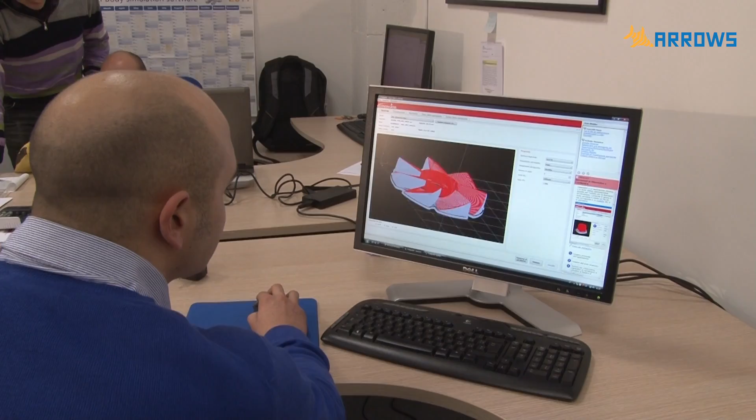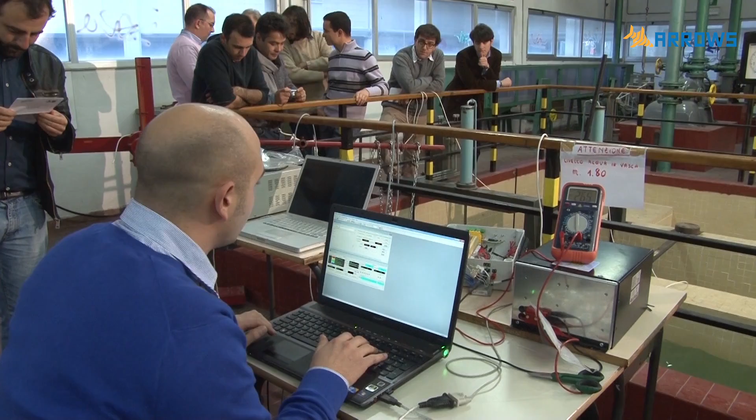ARROWS stands for Archaeological Robot System for the World's Sea. It is financed by the European Commission under the environment theme of the 7th Framework Program for Research and Technological Development. 10 partners, including universities, research centers, and private companies, have been involved in this project, coming from throughout Europe and coordinated by the University of Florence. Their specializations include underwater engineering, robotics, and visual engineering. The project kicked off in September 2012 and will end in August 2015.

The objective is to construct low-cost mini-submarines able to autonomously scan the sea bottom without human intervention from the surface, and to explore large tracts of sea in a short time. Finally, a technology now used only in the military and in the gas and oil industry will be available to archaeologists all over the world. The use of an AUV, autonomous underwater vehicle, also avoids risks to the personnel, no longer employed in hazardous dives, but safely sitting at a table while downloading and analyzing all the data coming from the robots.

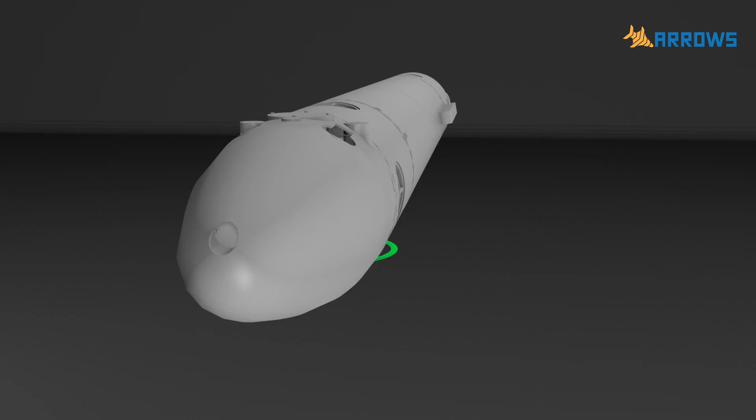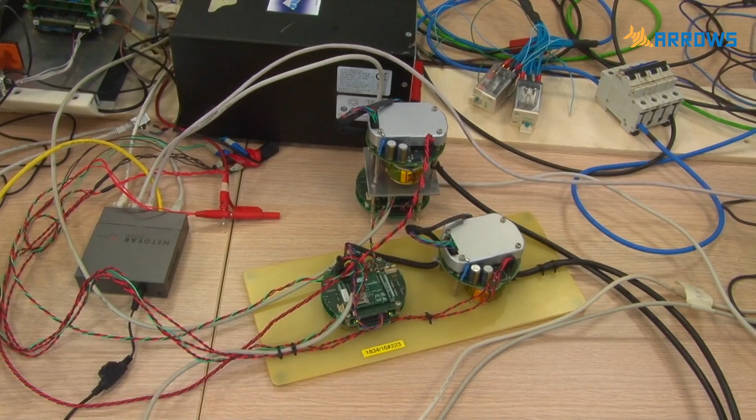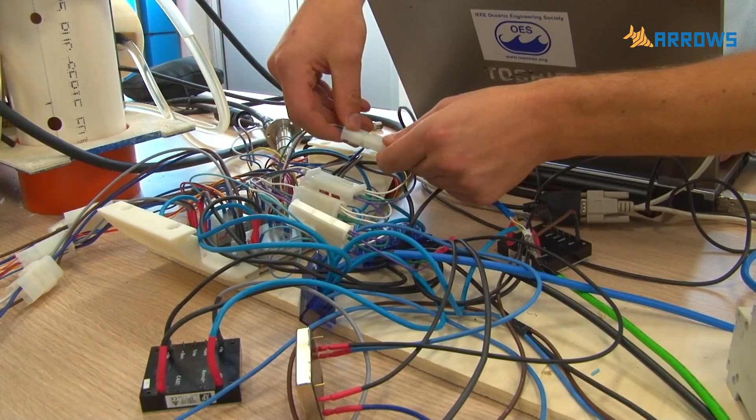To speed up the recognition phase and reduce the duration of the mission, the mini-submarines will swarm in formation. They will thus be able to communicate with each other, exchanging the acquired data and autonomously cooperating to the success of the mission. Once a robot spots an object of interest, it instantaneously alerts the rest of the swarm, so they can focus on analyzing the area. This is one of the most complex aspects of the ARROWS project, since wireless communications are useless underwater. The researchers, therefore, use low-frequency acoustic transducers to create an underwater network.

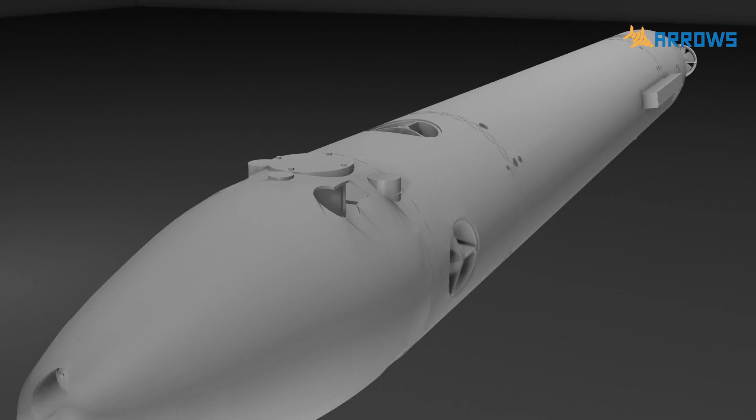The mini-submarines will face very different situations depending upon the phase of archaeological research. The first phase, in fact, requires the rapid exploration of vast tracts of seabed in search of a wreck. The second phase kicks in once a wreck has been located. This phase calls for a highly maneuverable robot, capable of approaching the wreckage without stirring up silt, which would affect the capabilities of onboard cameras. The ARROWS project plans to engineer a highly specialized AUV for each task.

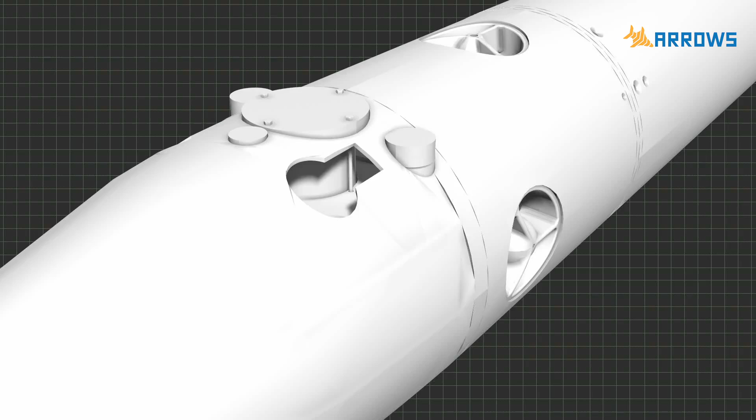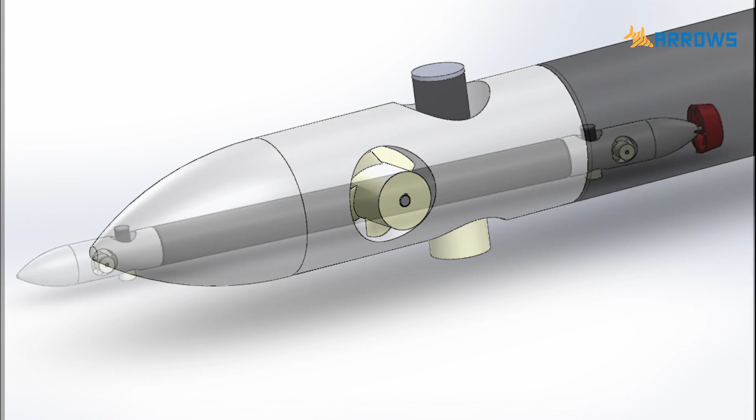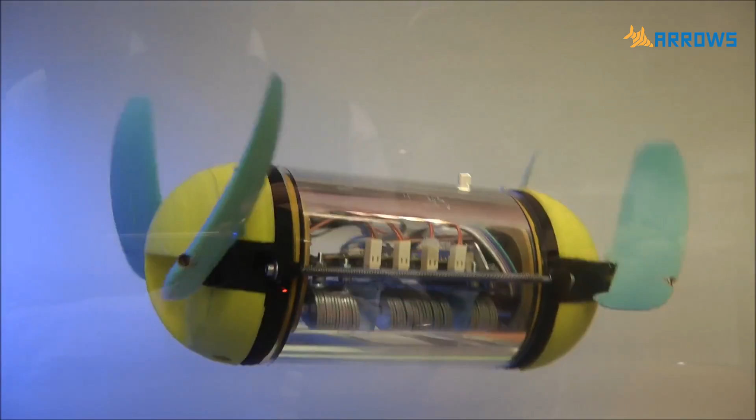The Typhoon will have a powerful engine, large batteries, and heavy sensors, all the core requirements for exploration tasks. A second AUV, the Marta, will be equipped with a cleansing unit for archaeological finds. The A-size AUV will be engineered to be an even smaller mini-submarine, cheaper and easily transportable, suitable for smaller boat use with reduced personnel. The last one, the U-Cat, is a highly experimental biomimetic robot. Mimicking a fish, it is propelled by 4 fins and capable of moving with dexterity within the wrecks to capture videos and photos of the interiors.

While construction continues on the vehicles, ARROWS's researchers are working on the complex integration of optical images acquired by cameras with acoustic images captured by sonar. Their fusion will allow a virtual reconstruction of relics which archaeologists will be able to browse from their computer, as if they were themselves aboard the mini-submarine. To study the details of relics, archaeologists will use a high-definition 3D scan created by means of a laser blade, a technique used up to now only for surface scans. The researchers are also working on software capable of reconstructing a mosaic picture of the wrecks from the available video feeds, a method which will reduce the great amount of work needed today to produce this precious tool for archaeologists.

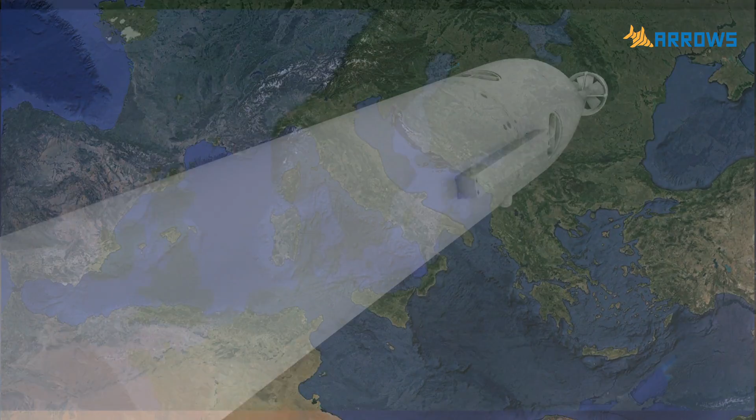The AUVs will be put to test in the Mediterranean and the Baltic Sea to test their ability of operating despite the presence of different currents, high or low temperatures, and various conditions of visibility. 2 seas very different from each other, but with one thing in common: the richness of the history of the bordering countries, a history part of which is still hidden below the seas. The future missions of ARROWS's mini-submarines will not only be a technological challenge, but also a journey in search of the roots of European culture.